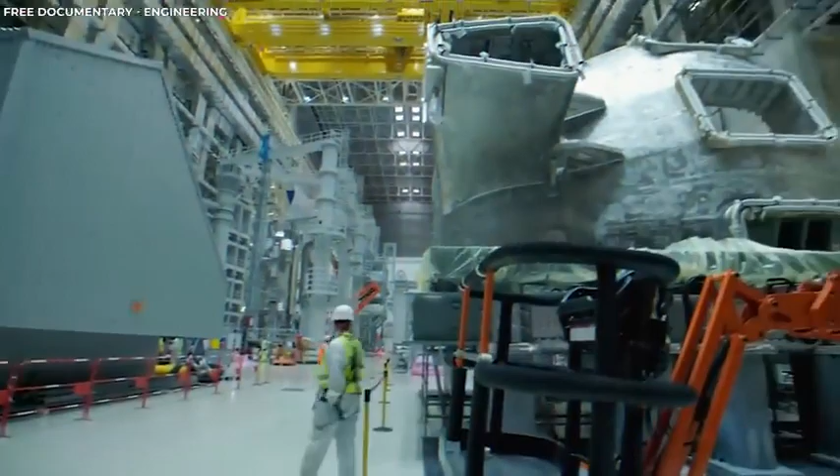The world of nuclear energy is one dominated by brilliant minds, where lots of innovation is happening. However, ITER, a monumental project that once promised great breakthroughs in nuclear energy, is close to shutting down. What is bringing this powerful project to its knees, and what does it mean for the future of nuclear energy? Keep watching to find out.

What can bring 33 of the most powerful nations together? Not the Soccer World Cup this time, but the ITER project. The International Thermonuclear Experimental Reactor, ITER project, is an ambitious international collaboration aiming to prove the feasibility of fusion as a large-scale and carbon-free source of energy.

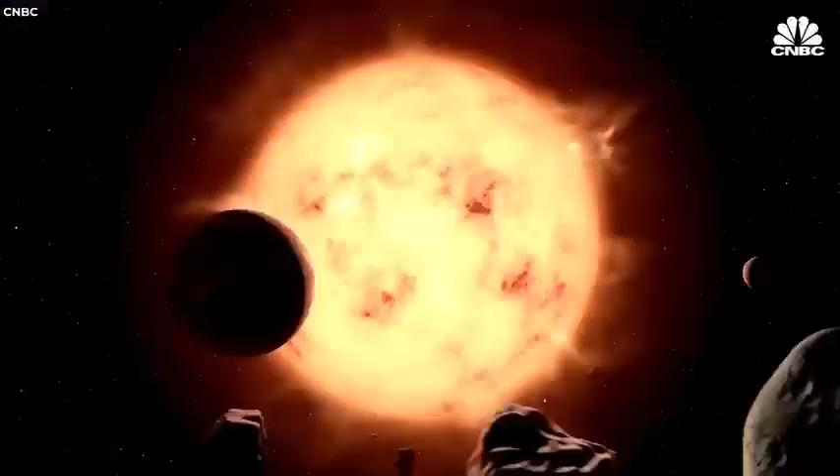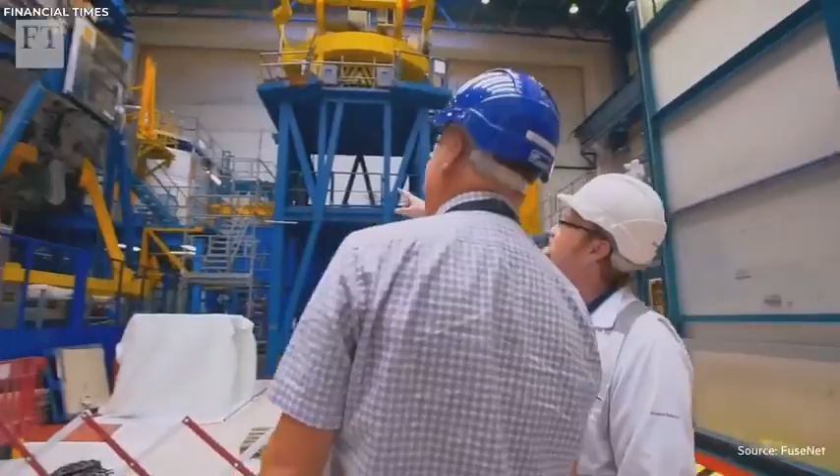Fusion, the process by which the sun and other stars produce energy, involves combining light atomic nuclei, like hydrogen, to produce heavier nuclei and tremendous amounts of energy. The primary mission of ITER is to demonstrate that it is scientifically and technologically possible to capture this energy for use on Earth.

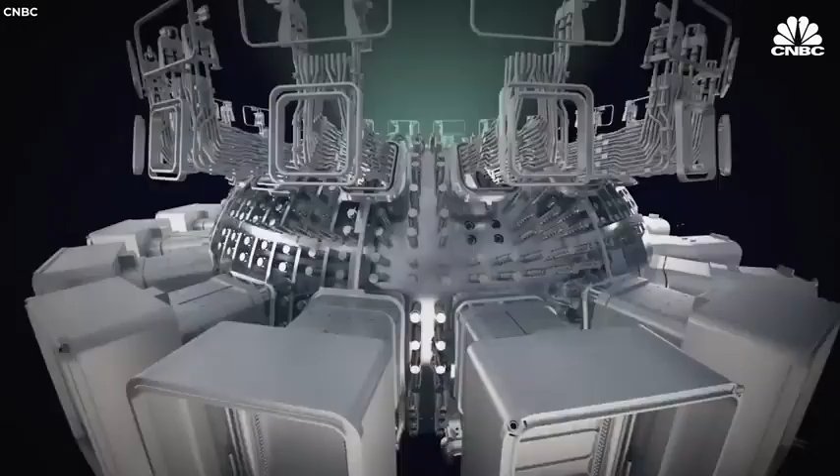The genesis of the ITER project can be traced back to the mid-1980s, at the height of the Cold War. In 1985, during a summit in Geneva, then U.S. President Ronald Reagan and Soviet leader Mikhail Gorbachev proposed an international effort to harness fusion. The formal agreement was reached in 1988, when representatives from the European Union, then the European Atomic Energy Community, Japan, the Soviet Union, and the USA, began the initial ITER design phase.

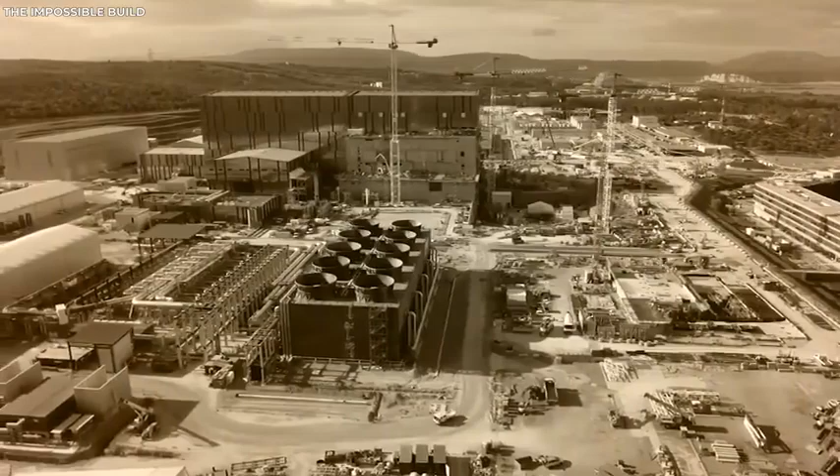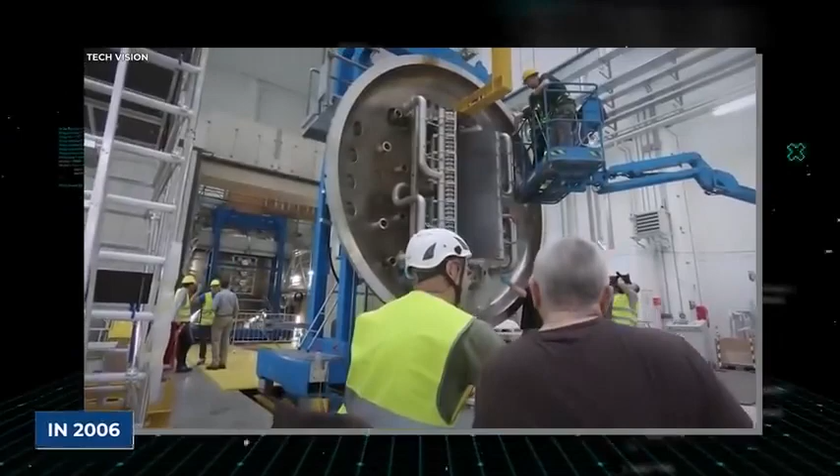Over the years, the project expanded to include 7 members, representing more than half of the world's population. The current members are the European Union, through Euratom, the United States, Russia, Japan, China, South Korea, and India. In 2006, after extensive negotiations and evaluations of multiple potential sites, the ITER members decided to build the facility in Saint-Paul-les-Durance in the south of France.

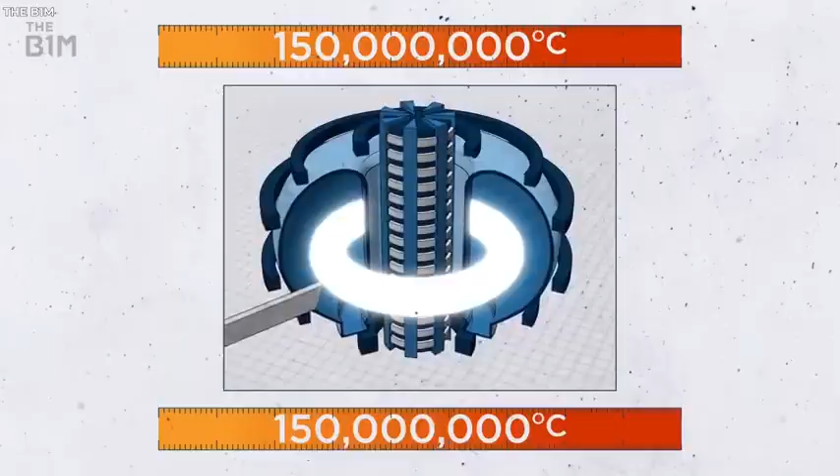At the heart of ITER is the tokamak, a magnetic confinement device designed to hold superheated plasma at conditions ripe for fusion. The tokamak's name originates from a Russian acronym meaning toroidal chamber with magnetic coils. How does this invention work? There are several aspects to it. Number 1 is magnetic confinement. The tokamak uses powerful magnetic fields to confine and stabilize the hot plasma, preventing it from touching the walls of the containment vessel.

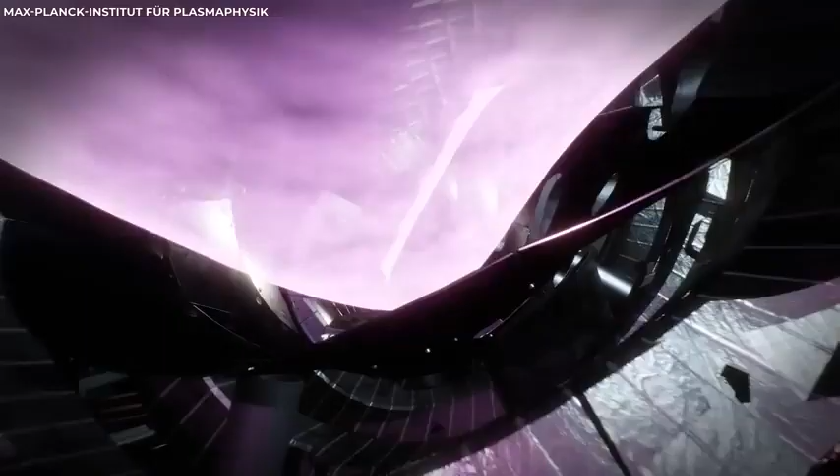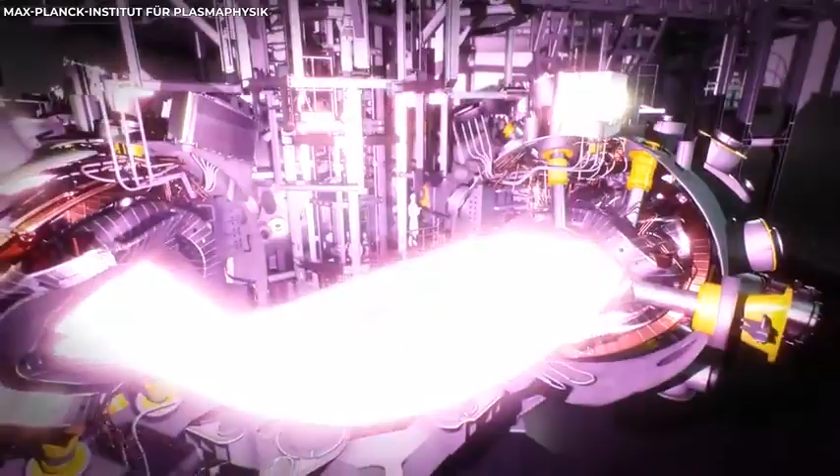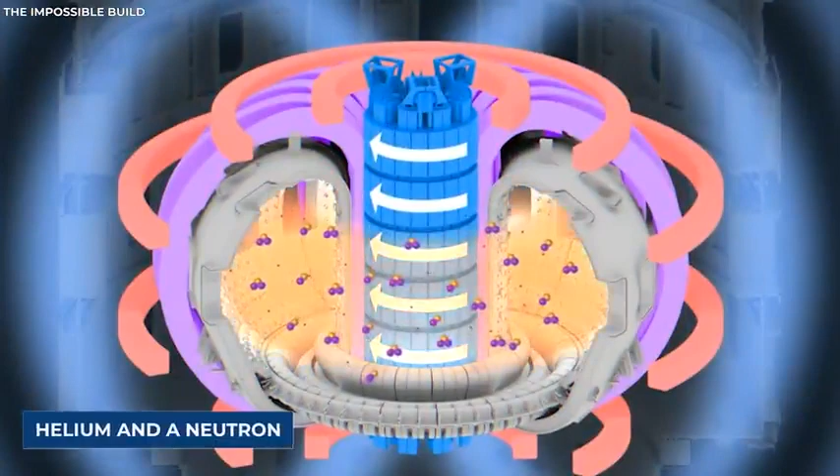Number 2 is heating the plasma. For fusion to occur, the plasma needs to be heated to temperatures exceeding 150 million degrees Celsius, which is about 10 times hotter than the core of the sun. This heating is accomplished through a combination of methods: ohmic heating, or passing a current through the plasma, neutral beam injection, and radio frequency heating. Number 3 is deuterium and tritium. ITER will use a mixture of deuterium and tritium, 2 isotopes of hydrogen, as fuel. When these isotopes fuse, they produce helium and a neutron, along with a lot of energy.

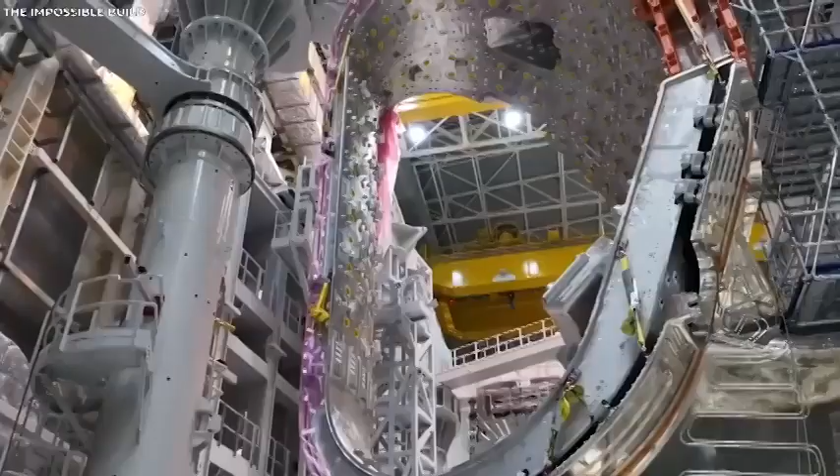Number 4 is divertor. At the bottom of the ITER tokamak is a component called the divertor. It is designed to handle and remove the waste material from the plasma. Number 5 is superconducting magnets. ITER employs large superconducting magnets to generate the strong magnetic fields necessary for plasma confinement. These magnets are cooled by liquid helium to make them superconducting, which ensures that they can carry the massive currents required without losing energy to electrical resistance.

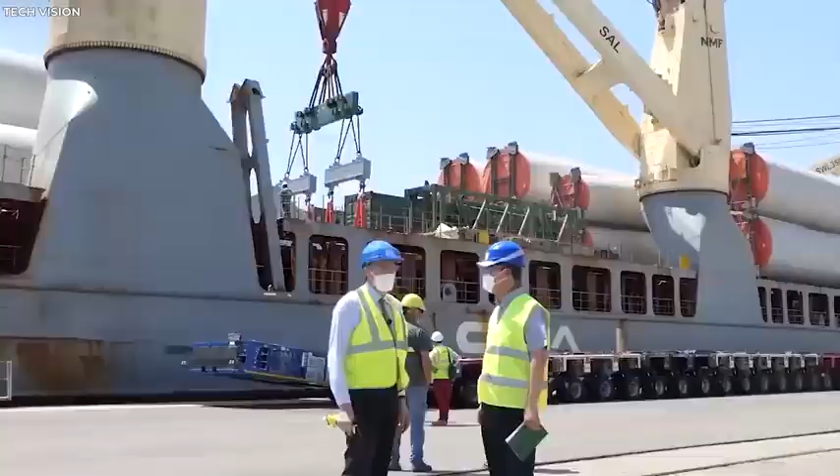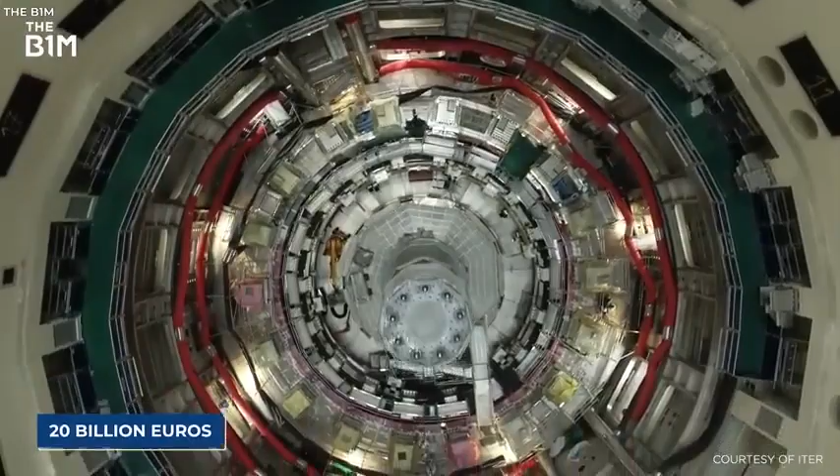How much has ITER cost its sponsors? As with many international mega projects, the budget for ITER has grown over time. Initially, in the early phases, the project was estimated to cost around 5 billion euros. However, as of the last update in 2021, the cost of ITER has risen to approximately 20 billion euros. It's worth noting that this figure could continue to evolve as the project progresses. There are several reasons for the cost overruns.

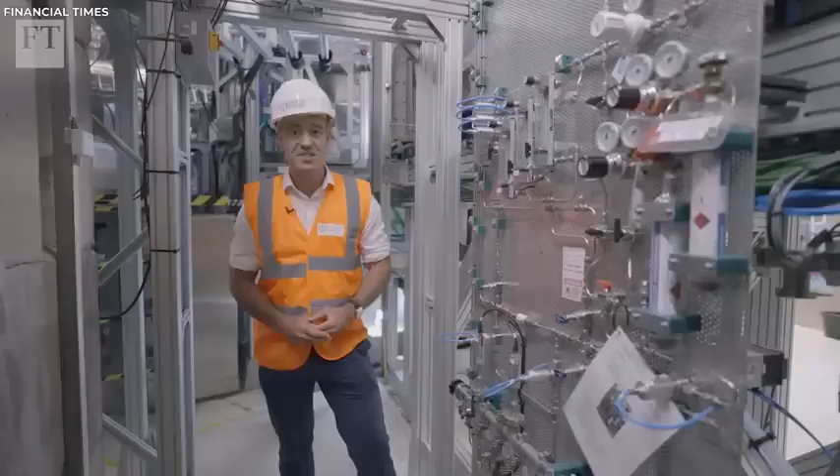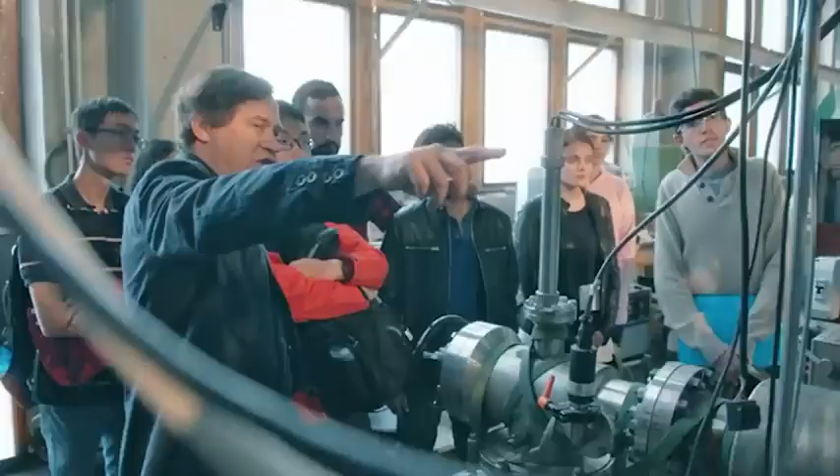Technical challenges. Fusion is an incredibly challenging process to reproduce on Earth. This means the technologies and methodologies needed are groundbreaking and often untested on such a scale, leading to uncertainties and unexpected problems that can inflate costs. Logistics of international collaboration. Coordinating between the 7-member entities, each of which is responsible for delivering specific parts of the reactor, has proven more complex and time-consuming than initially anticipated.

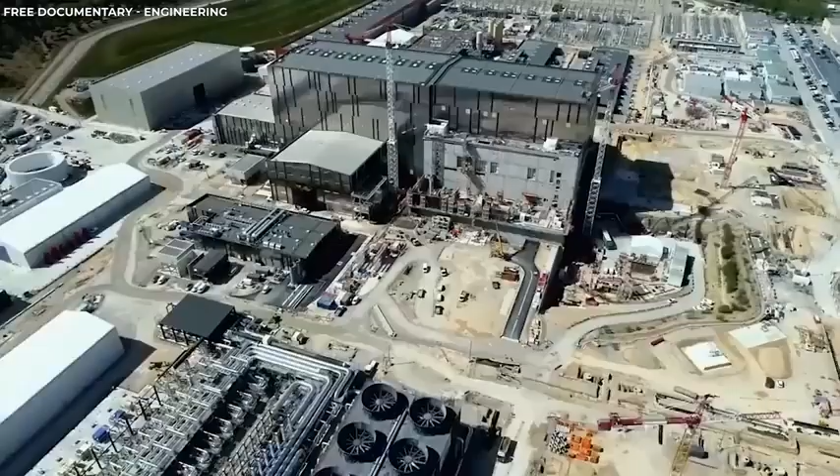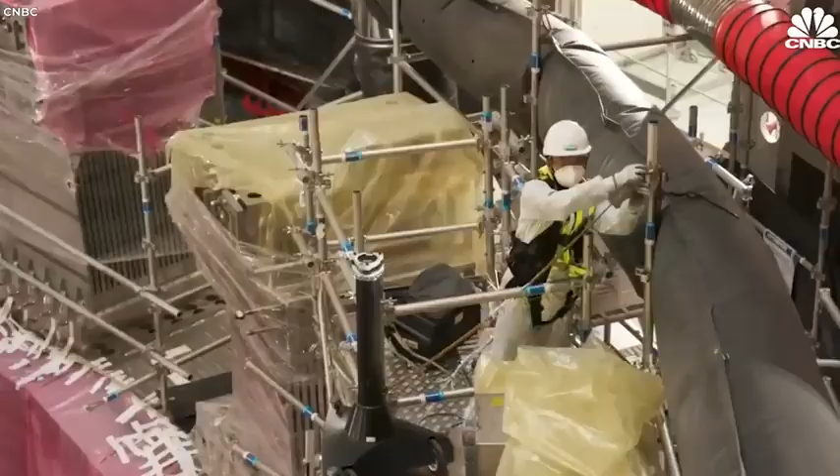Regulatory and safety measures. Building the world's largest tokamak requires stringent safety and quality assurance processes. Ensuring that ITER meets the highest standards has sometimes led to delays and added expenses. Despite the costs, many argue that the potential benefits of mastering fusion technology far outweigh the investment. Fusion promises a virtually limitless source of energy with minimal carbon emissions and without the long-lived radioactive waste associated with fission-based nuclear power.

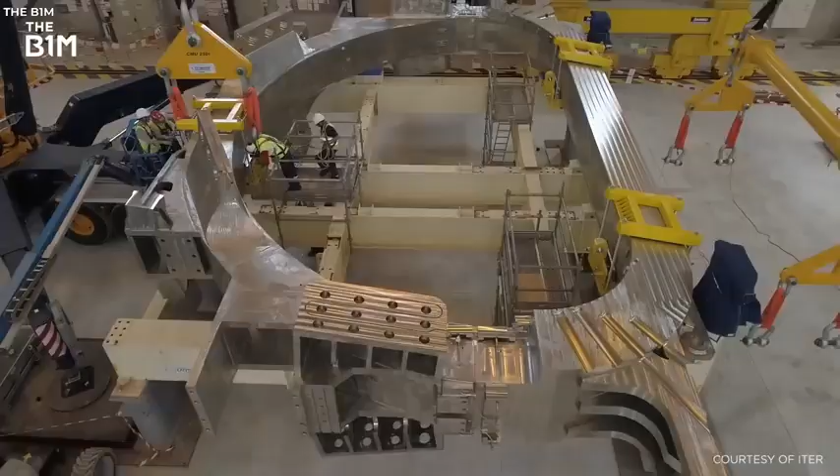Progress and future plans: the ITER project has reached several significant milestones. Construction of many of the primary facilities is either complete or well underway, and the assembly phase of the tokamak has begun.

However, when operational, ITER won't generate electricity directly. Instead, it will produce 500 MW of fusion power for 20-minute durations, a significant increase from previous experimental reactors. This will serve as proof of concept and open the door to DEMO, the next step fusion power plant.

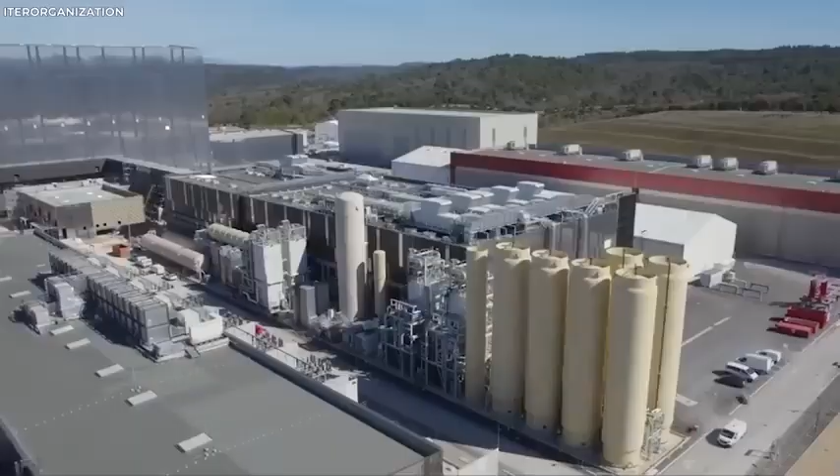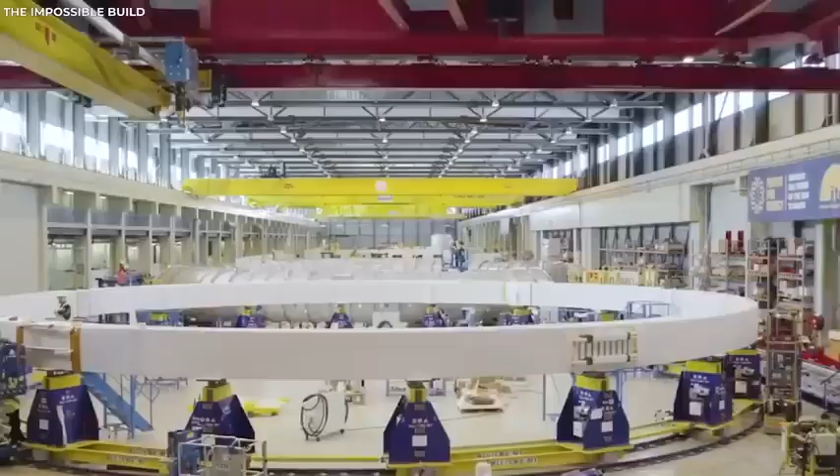One criticism of the ITER project is its high and rising electricity consumption. The ITER project will require hundreds of megawatts of electricity from the regional electric grid to operate its auxiliary systems, such as cryostats, vacuum pumps, heating systems, and magnet power supplies.

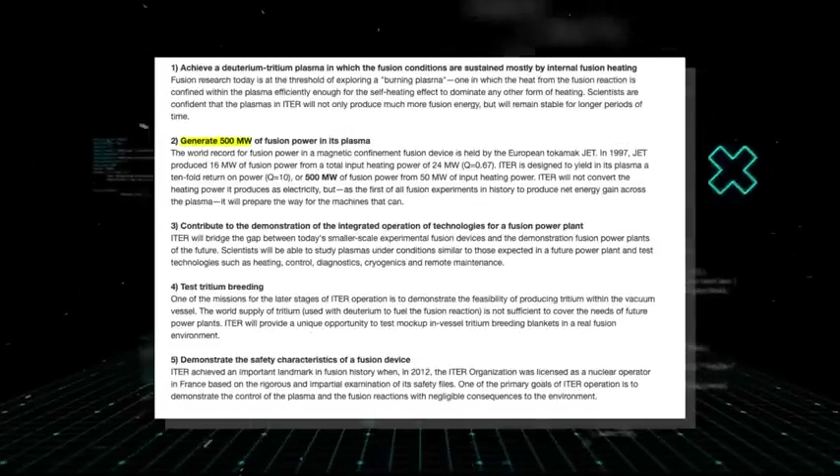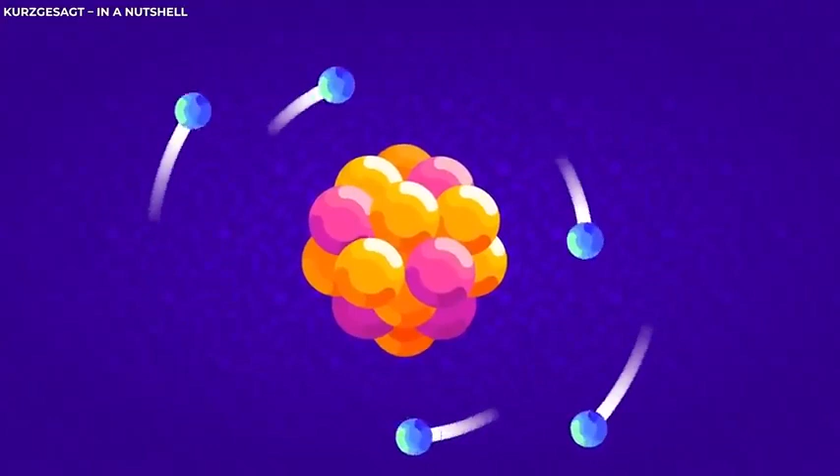The ITER website states that the project will produce 500 megawatts of fusion power with an input power of 50 megawatts. However, this statement is problematic, as it implies that both numbers refer to electric power. In actual fact, the output power refers to fusion power, embodied in neutrons and alphas, which cannot be converted to electricity in ITER.

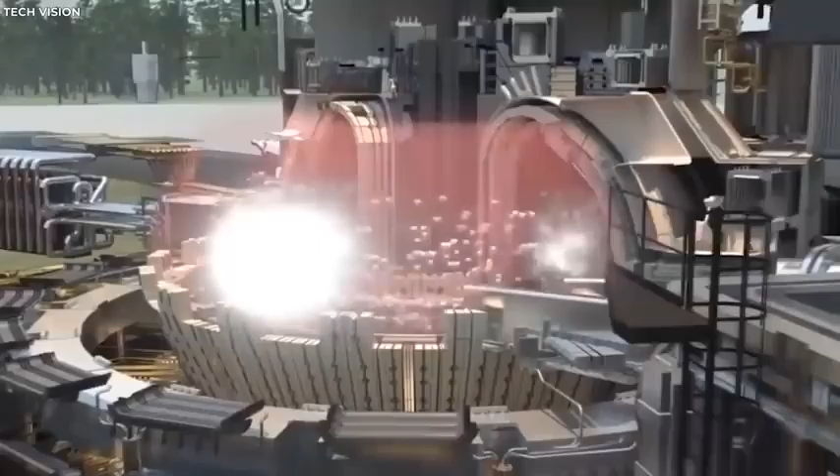The input power refers to the heating power injected into the plasma to help sustain its temperature and current, and it is only a small fraction of the overall electric input power to the reactor, which varies between 300 and 400 megawatts.

Moreover, this electric input power does not include the energy invested in the construction and maintenance of the reactor facility, which is also enormous. Critics point out that the ITER project will consume more energy than it produces, and that it will divert resources from more feasible and cost-effective energy research projects.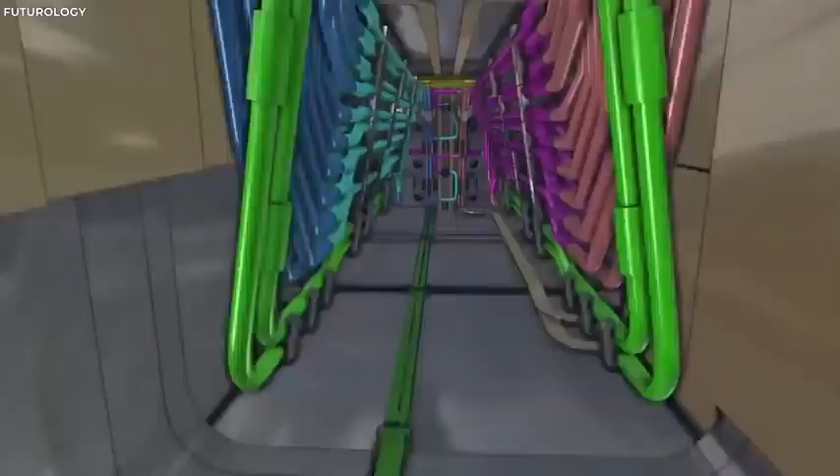Another criticism of the ITER project is its dependence on tritium fuel, which is scarce, radioactive, and difficult to handle. Tritium is a hydrogen isotope that does not exist naturally on Earth, but has to be produced artificially by bombarding lithium with neutrons. The ITER project plans to use a 50-50 mixture of deuterium and tritium as fuel for fusion, as it has the highest reactivity among possible fusion fuels.

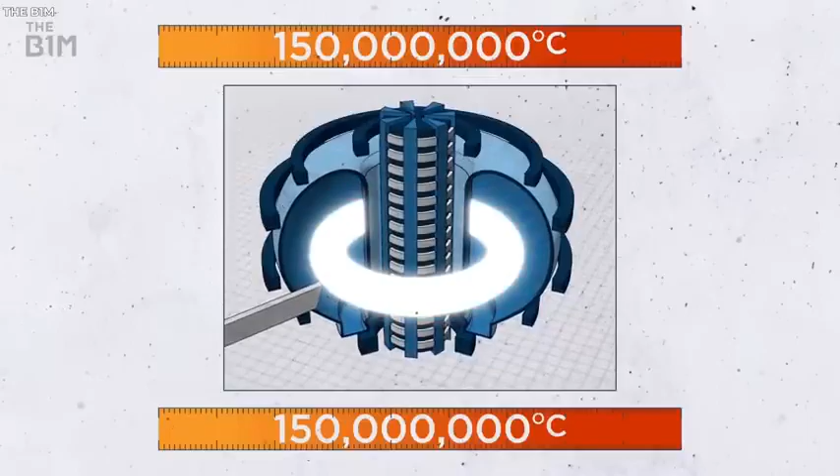However, we run into several problems using tritium as fuel. First, there is no natural supply of tritium on Earth, and the current global inventory is only about 25 kilograms, which increases by only about half a kilogram per year.

The ITER project will require at least 1 kilogram of tritium annually, which will have to be purchased from fission reactors or produced in test modules inside the reactor. Second, tritium is somewhat radioactive, with a half-life of only 12.3 years. This poses safety concerns for its storage, transport, and use in the reactor.

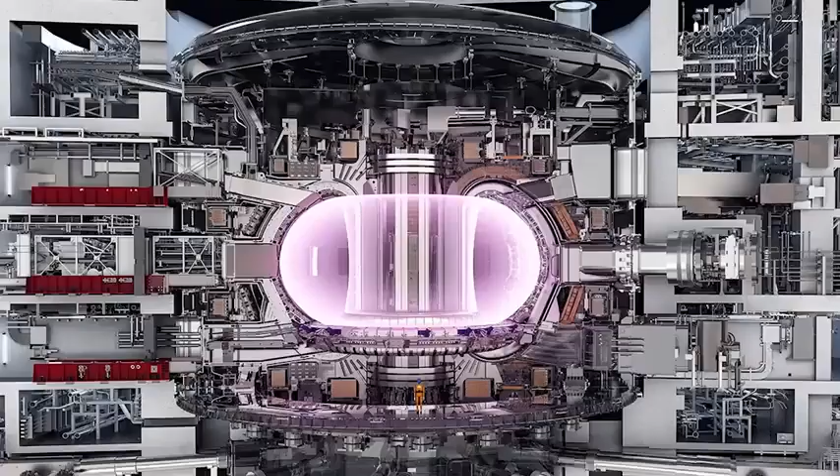Third, tritium is difficult to handle and recover in a fusion reactor. Analyses of DT operation in ITER indicate that only 2% of the injected tritium will be burned in fusion reactions, while 98% will exit the plasma unscathed or be trapped in various reactor components. Some tritium will inevitably leak into the environment or decay into helium-3. Critics doubt that tritium can ever be supplied or managed adequately for a large-scale fusion reactor.

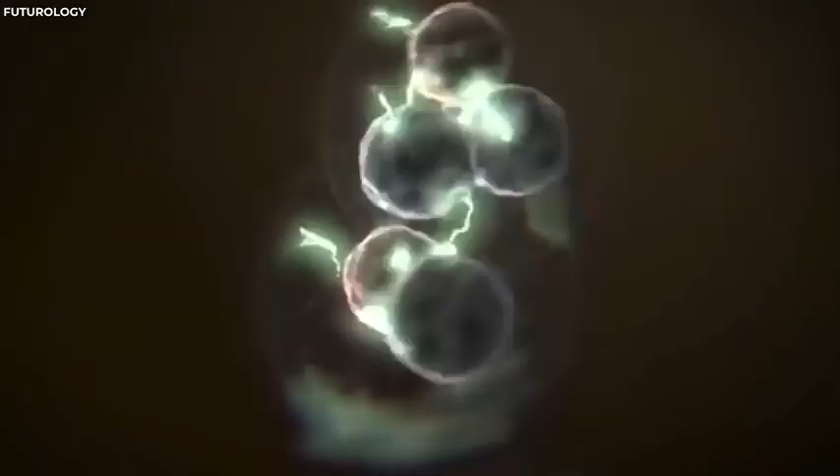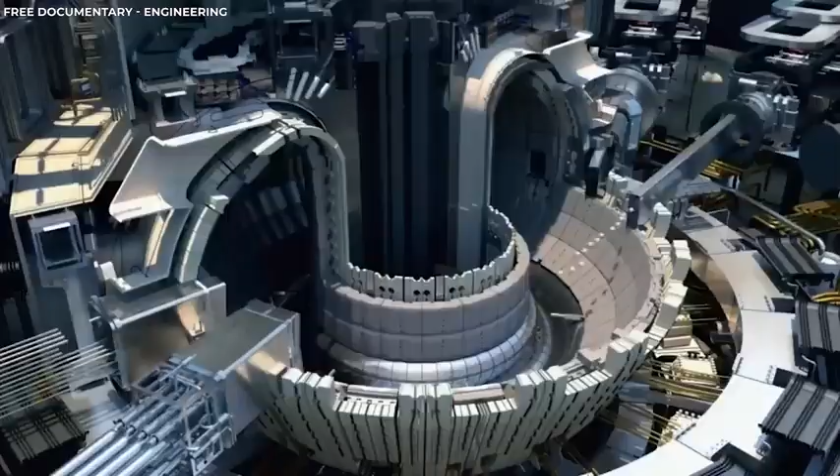A third criticism of the ITER project is its production of large amounts of neutron radiation and radioactive waste. The fusion of deuterium and tritium produces helium and a neutron, which carries most of the energy released by the reaction. However, these neutrons are not benign solar-like radiation, but rather high-energy particles that can damage materials and induce radioactivity.

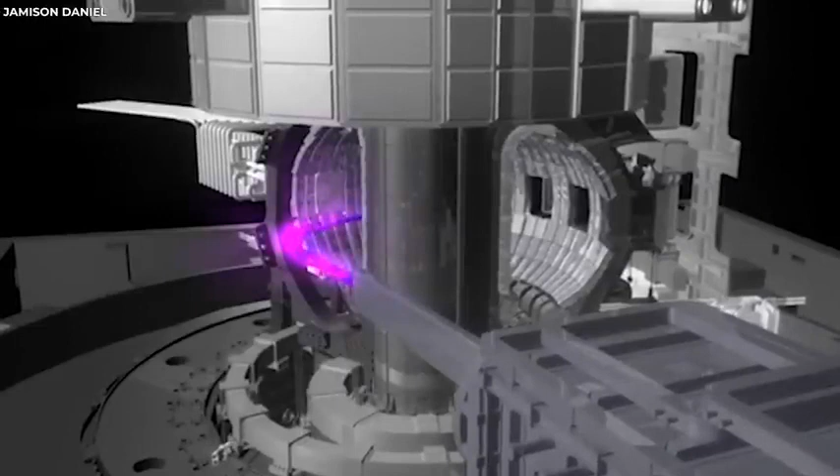The neutrons will escape the magnetic field that confines the plasma and hit a blanket of material surrounding the plasma. The blanket will absorb the neutron energy and transfer it to a coolant system that can be used for electricity generation or other purposes. The blanket will also breed more tritium from lithium for future use.

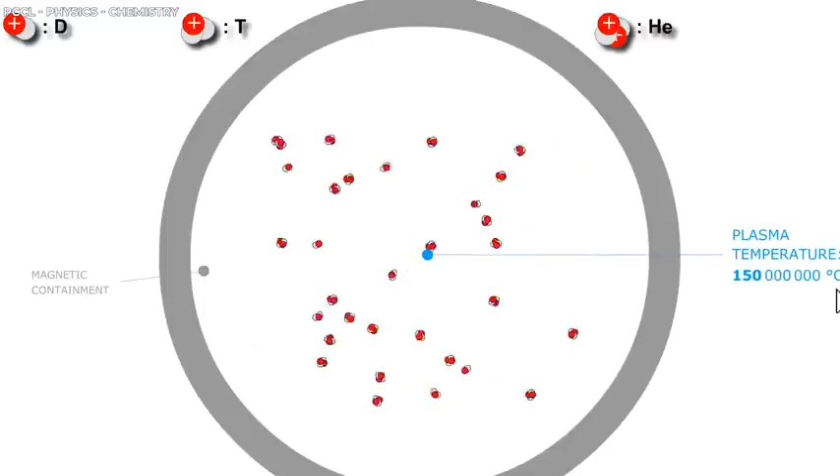However, these functions come at a cost. The neutron bombardment will cause swelling, embrittlement, and fatigue in exposed materials, create dangerous radioactivity in all exposed reactor components, and generate huge volumes of radioactive waste that will have to be stored and disposed of safely.

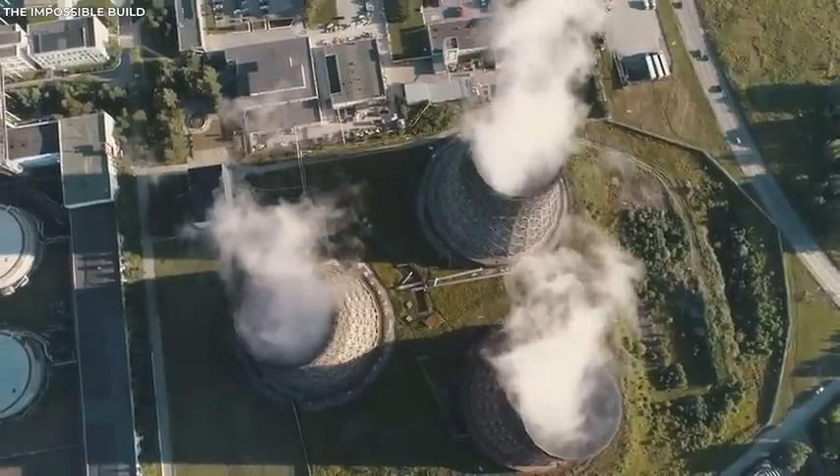The ITER project estimates that it will produce 30,000 tons of radioactive waste over its lifetime, including decommissioning, of which 6,000 tons will still be dangerously radioactive after 100 years. Critics contend that fusion reactors are not as environmentally friendly or safe as they claim to be.

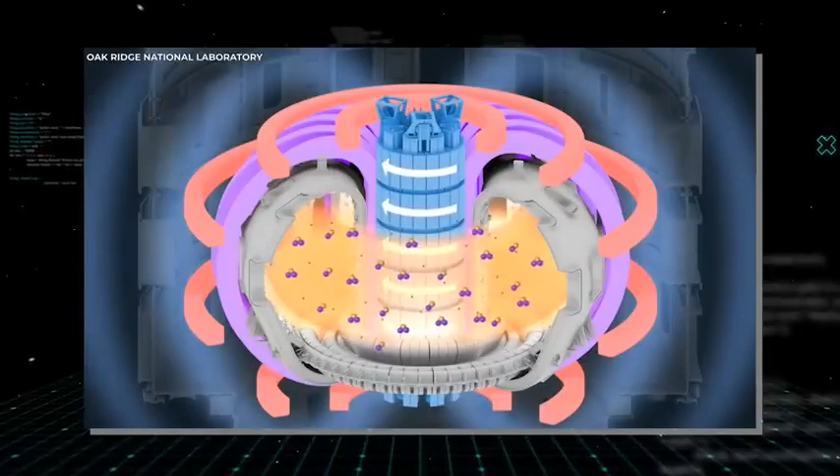A fourth criticism of the ITER project is its demand for cooling water resources. Fusion reactors require torrential water flows to remove heat from various reactor systems, such as reactor vessels, plasma heating systems, tokamak electrical systems, cryogenic refrigerators, and magnet power supplies. The ITER project will use cooling water from the Canal de Provence, which is formed by channeling the Durance River. The cooling water will be recirculated and discharged into the atmosphere by cooling towers.

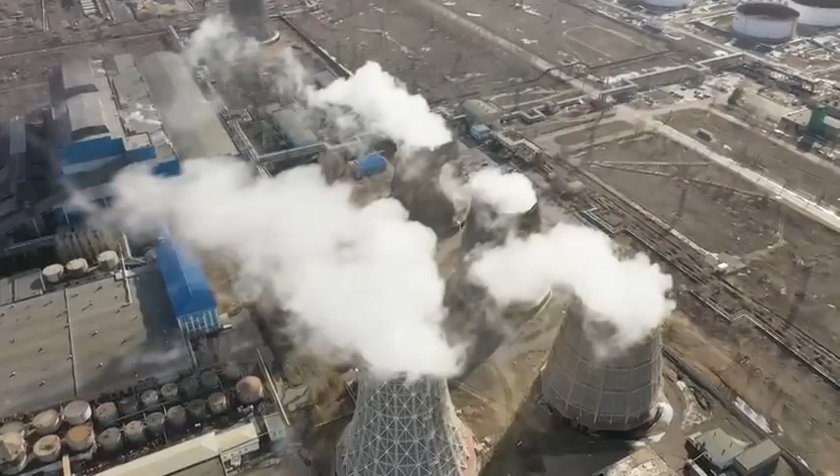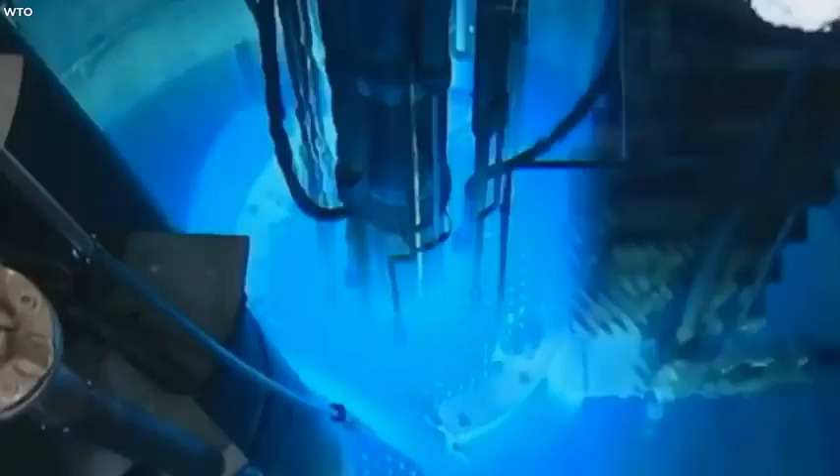The ITER project estimates that the total heat load could be as high as 1,000 megawatts, and that the combined flow rate of all the cooling water will be as large as 12 cubic meters per second, or more than 1/3 of the flow rate of the canal.

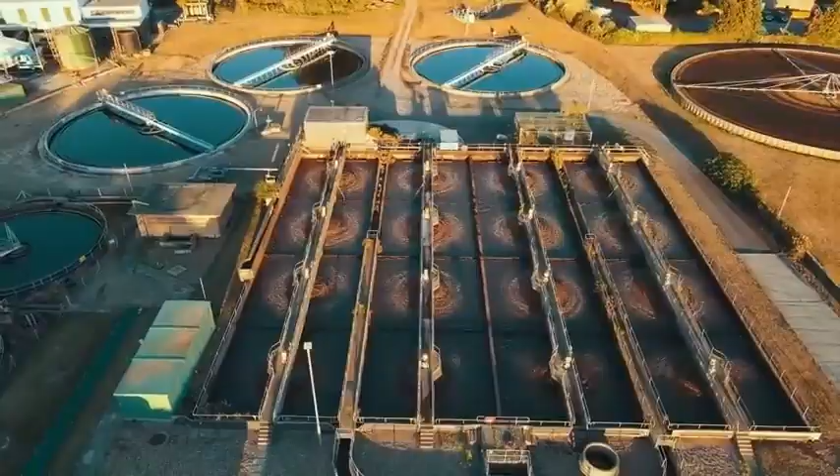Critics point out that fusion reactors are much greater consumers of water than any other type of power generator, because of the huge parasitic power drains that turn into additional heat that needs to be dissipated on site. They also question the availability and sustainability of cooling water resources in a world where fresh water and even cold ocean water are becoming increasingly scarce.

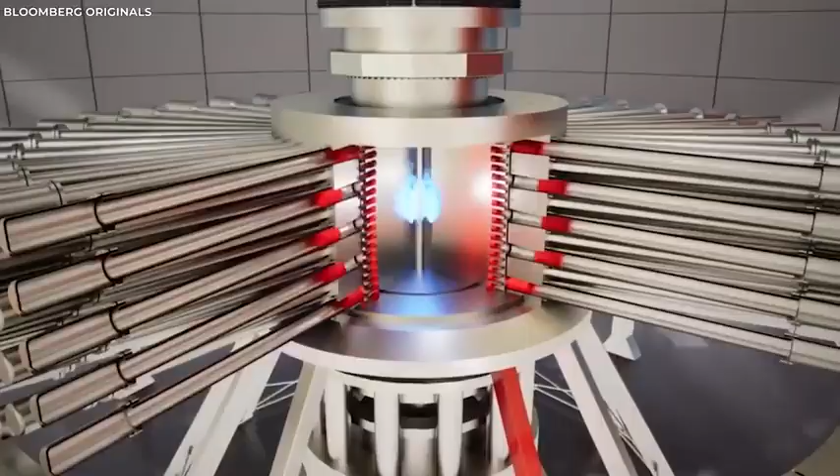Where does that leave us with nuclear energy? Thankfully, other technologies are coming up. One of them is the stellarator. The stellarator is a type of nuclear fusion reactor that uses magnetic fields to confine a plasma, the hot and charged state of matter that fuels the fusion reactions.

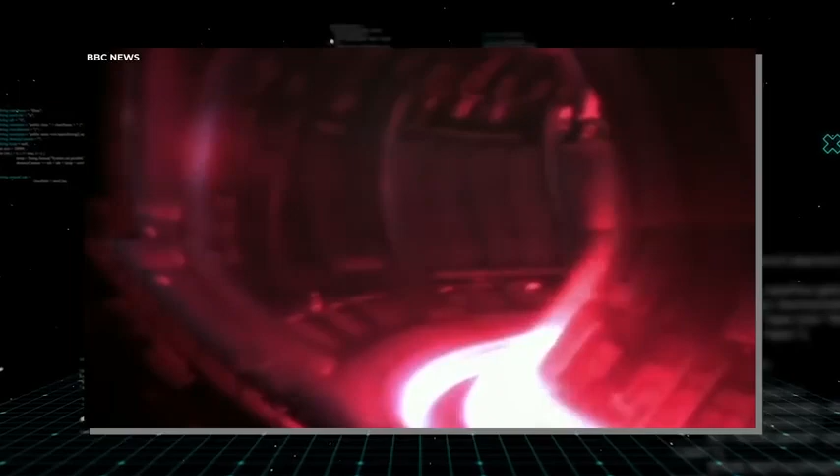Unlike the more common tokamak design, which relies on a large electric current flowing in the plasma to create part of the magnetic field, the stellarator generates the entire magnetic field with external coils.

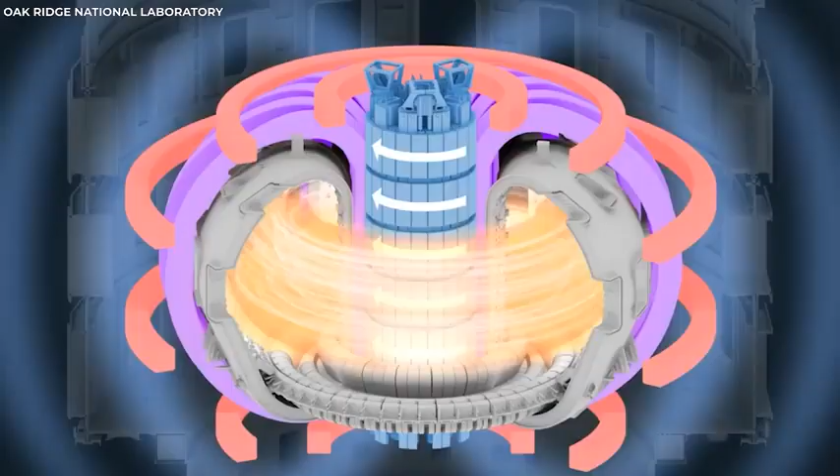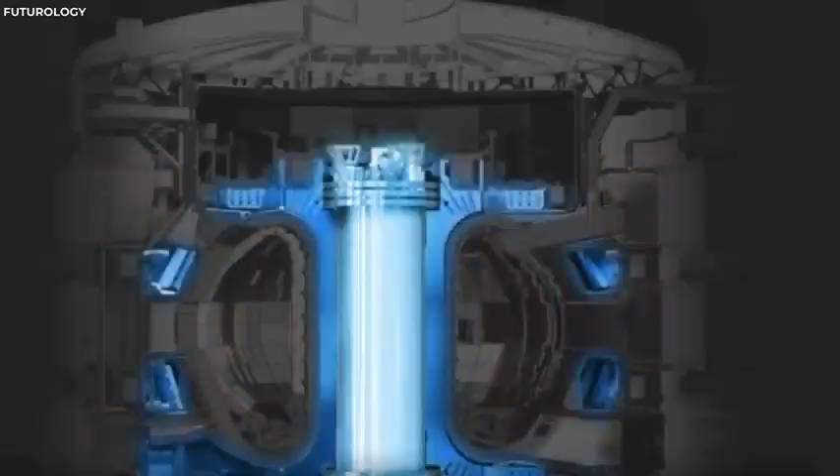How is the stellarator different from the ITER? There are several ways. First, the magnetic field. In a tokamak, the magnetic field that twists and shapes the plasma is formed by a combination of an external toroidal field and an internal poloidal field. The poloidal field is generated by a large electric current flowing in the plasma, which is induced by a transformer. In a stellarator, the magnetic field is produced entirely by external non-axis symmetric coils, which have a complex and twisted shape.

Next, plasma current. In a tokamak, the plasma current is essential for creating part of the magnetic field and maintaining the plasma equilibrium. However, it also causes several problems, such as resistive heating, magnetohydrodynamic or MHD instabilities, disruptions, and runaway electrons. In a stellarator, the plasma current is negligible or zero, which avoids these issues but also reduces the plasma stability and performance.

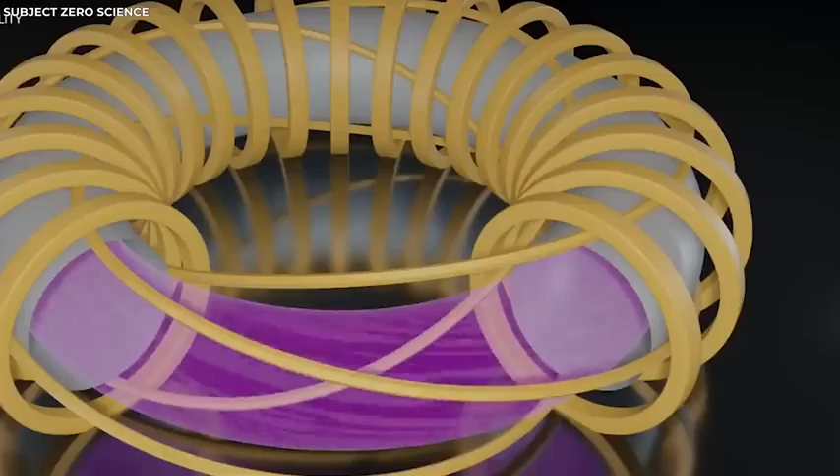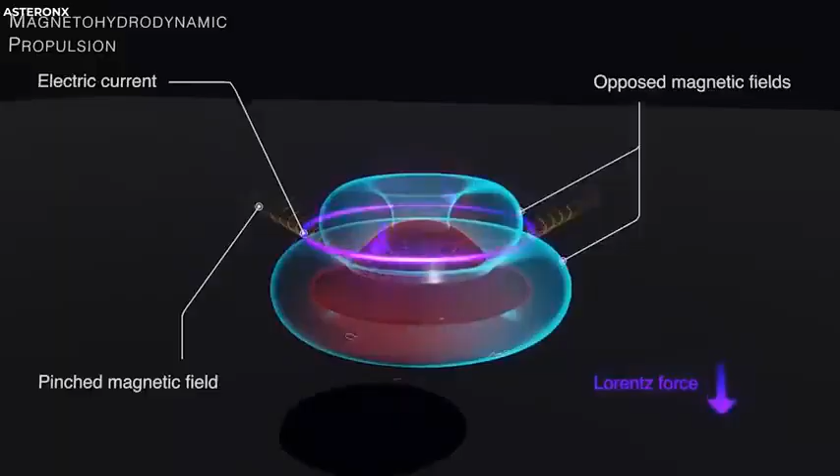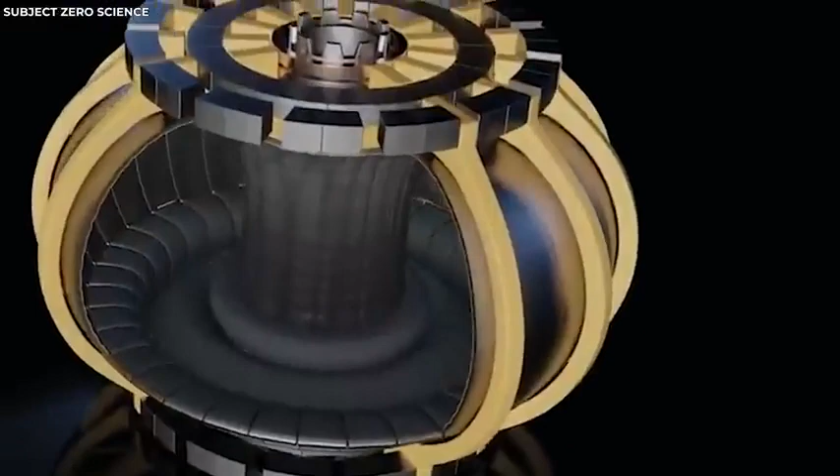Next, magnetic shear. In a tokamak, the magnetic shear is usually positive throughout the plasma, which means that the rotational transform, the angle of twist of the magnetic field lines, increases with the radius. This helps to stabilize some MHD modes and reduce plasma turbulence. In a stellarator, the magnetic shear is typically negative or zero, which means that the rotational transform decreases or stays constant with the radius. This can lead to more MHD activity and transport losses.

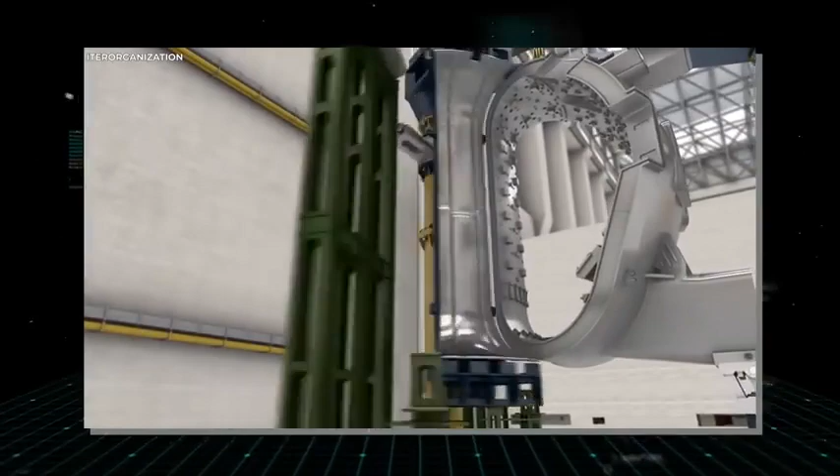Next, plasma shape. In a tokamak, the plasma cross-section is usually circular or elliptical, with some degree of triangularity or squareness. This affects the plasma confinement and stability. In a stellarator, the plasma cross-section can have various shapes, depending on the coil configuration. Some stellarators have a bean-shaped or crescent-shaped cross-section, which can improve the plasma quality.

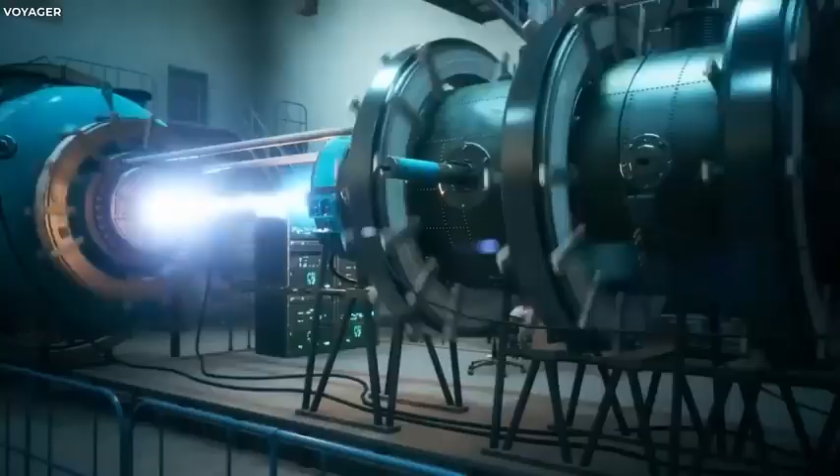These differences give the stellarator several advantages for a fusion power plant. First, steady-state operation. The stellarator can run continuously without interruptions since it does not need to periodically ramp up and down the plasma current. This reduces the stress on the reactor components and increases the power output.

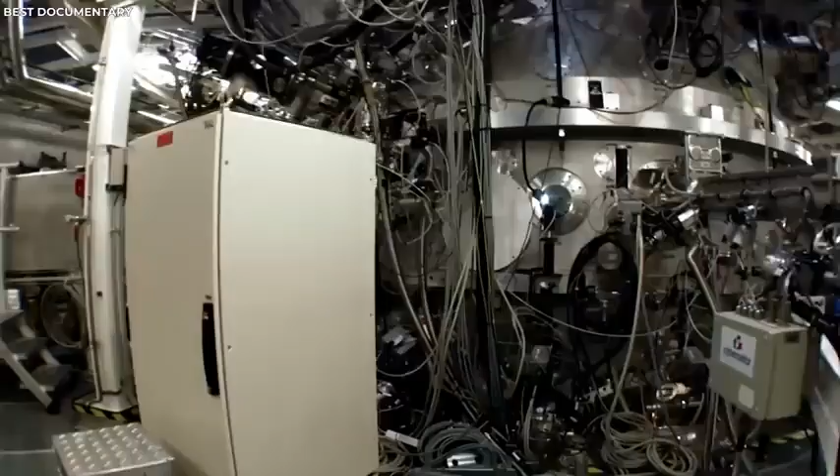Second, low recirculating power. The stellarator does not need to use a transformer to induce the plasma current, which consumes a significant fraction of the electricity generated by a tokamak. This improves the efficiency and economics of the fusion plant.

Third, benign heat loads. The stellarator can handle high plasma densities and pressures without producing large edge instabilities that can damage the plasma-facing components. This allows for better plasma performance and longer component lifetimes.

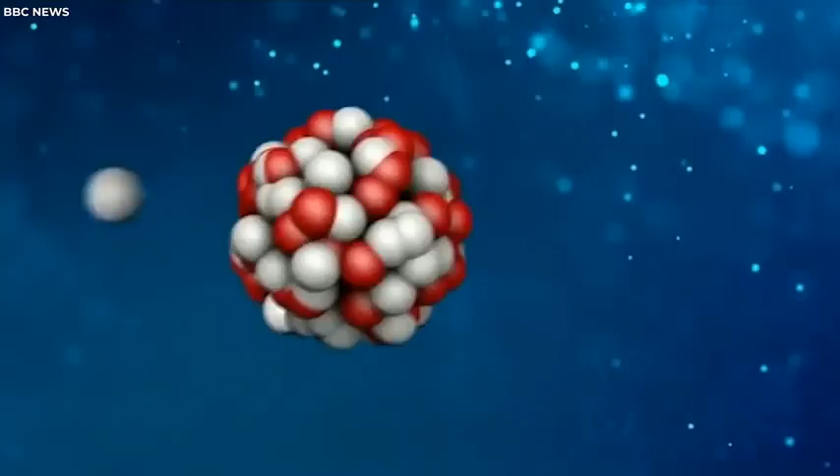And fourth, no runaway electrons. The stellarator avoids the formation of runaway electron beams that can occur in tokamaks during disruptions. These beams can cause severe damage to the reactor walls and pose a safety hazard.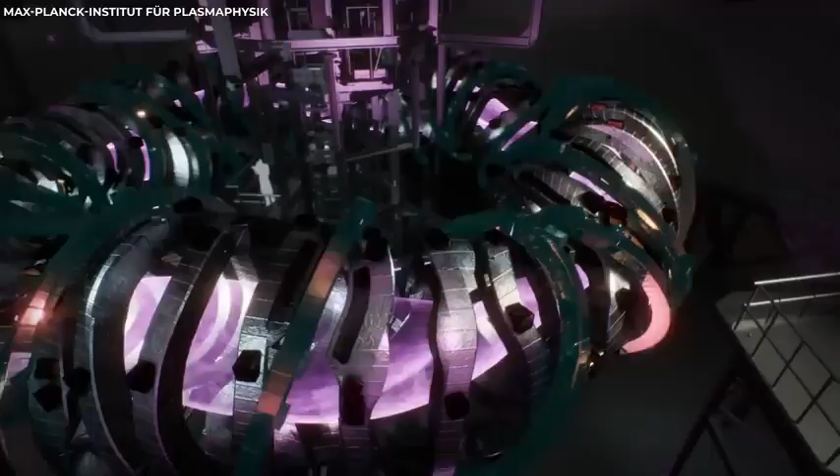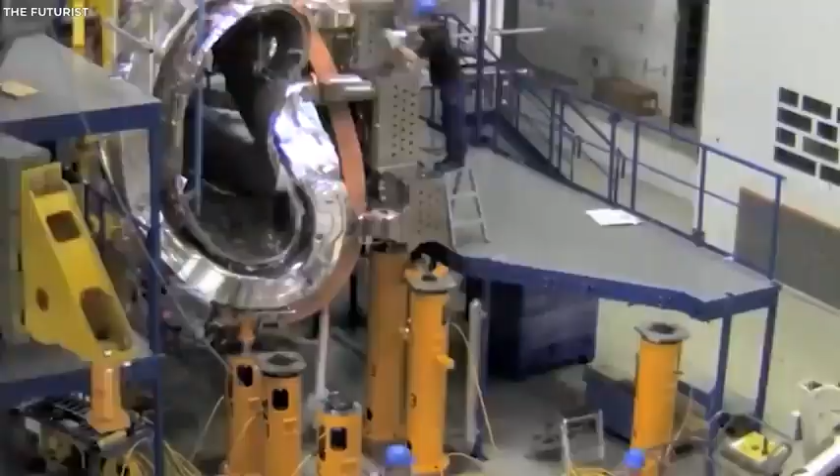The Wendelstein 7-X, or W7-X, is the world's largest and most advanced stellarator, built in Germany by the Max Planck Institute for Plasma Physics (IPP). It is designed to test the feasibility of the stellarator concept for a power plant by achieving high plasma temperatures, densities, and confinement times. It is also testing an optimized magnetic field configuration that minimizes the heat and particle losses from the plasma. Some of the achievements and challenges of W7-X are high plasma performance.

W7X has demonstrated plasma temperatures of over 100 million degrees Celsius, comparable to those in a tokamak of the same size. It has also achieved a record value of the triple product, a measure of the plasma quality for fusion, by using ice pellets to fuel the plasma. Long plasma duration. W7X has produced plasma discharges lasting up to 30 seconds, showing the potential for continuous operation.

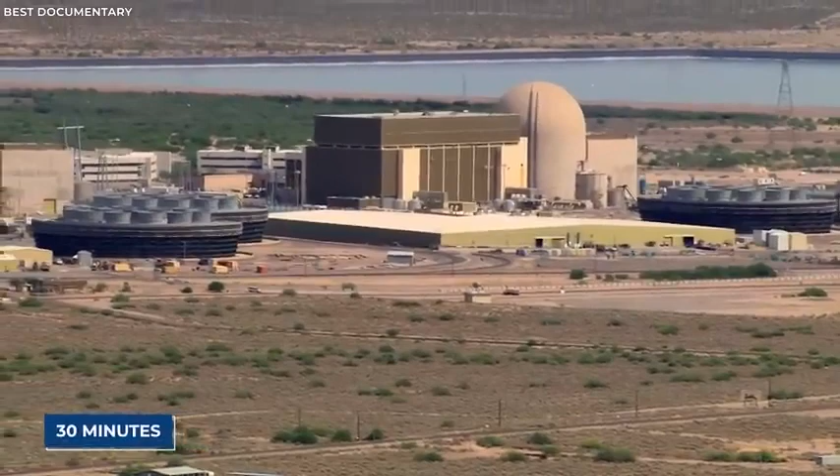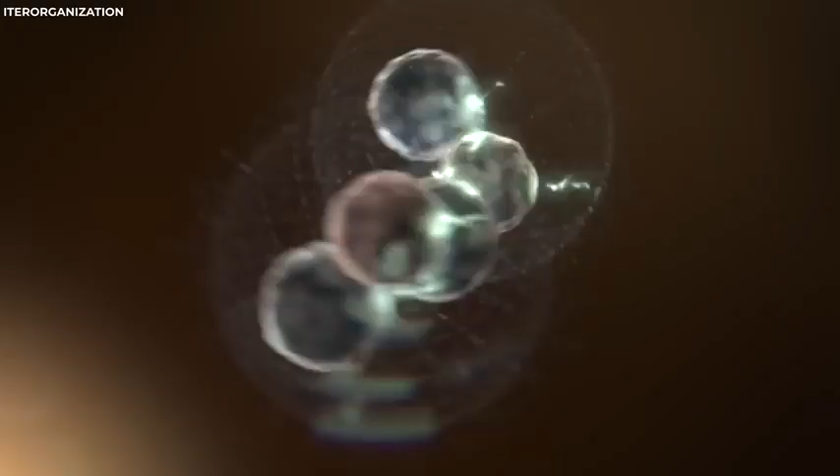It aims to extend this duration to 30 minutes after installing water-cooled divertor plates that can handle higher heat fluxes from the plasma. Low neoclassical transport. W7X has confirmed that its complex and twisted magnetic field reduces the neoclassical transport, a type of heat loss caused by collisions and drifts of plasma particles. This validates the computer-aided design of the stellarator and improves the plasma confinement.

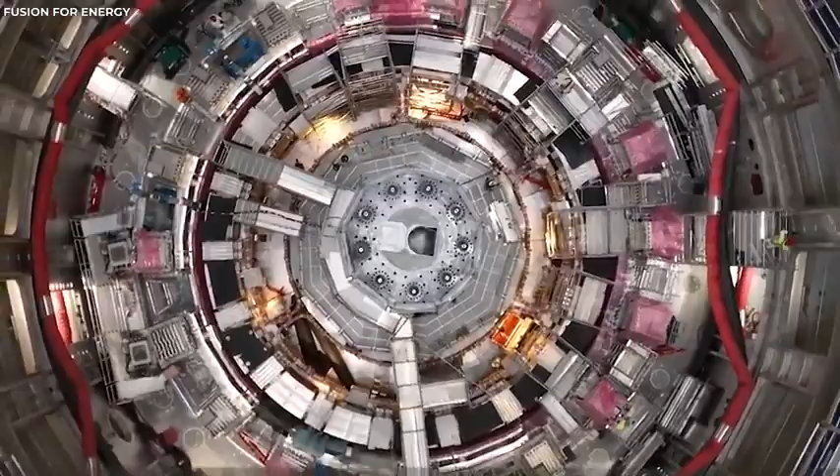High plasma turbulence. W7X has also observed that its magnetic field does not suppress the plasma turbulence, another source of heat loss caused by fluctuations and instabilities in the plasma. This limits the maximum achievable ion temperature and requires additional heating methods to overcome it.

There are exciting startups that are working hard to make stellarators a reality. One of them is Type 1 Energy. Type 1 Energy has recently secured $29 million in funding from several investors, including Breakthrough Energy Ventures, which is backed by Bill Gates and other billionaires.

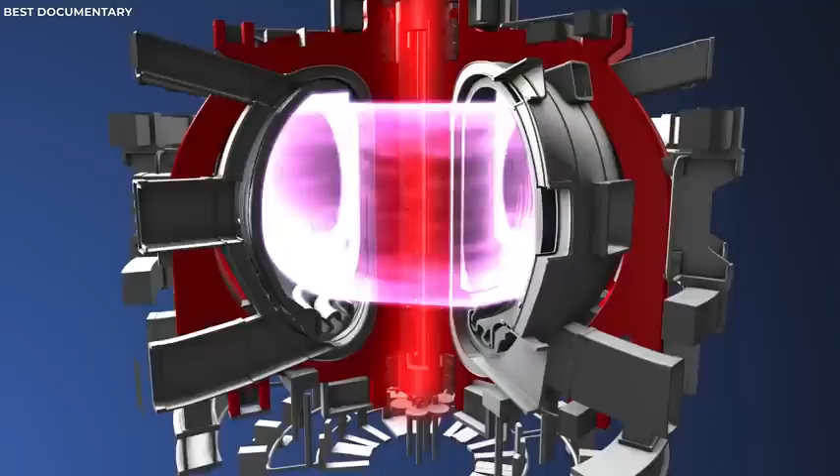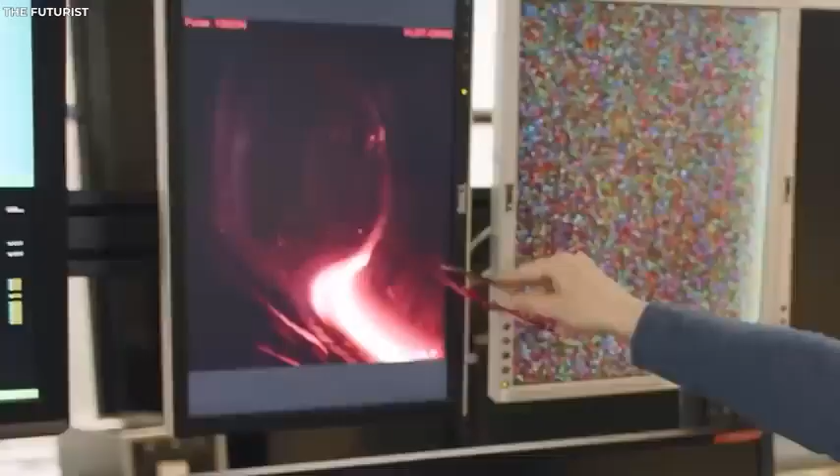The company plans to use the money to develop its Fusion Direct program, which leverages recent advances in stellarator fusion performance, plasma science, and high-temperature superconducting magnet technology. These technologies enable Type 1 Energy to create a low-risk short-term path to fusion energy without building another costly, large-scale science validation machine.

Type 1 Energy has a strong technical team that includes experts from the University of Wisconsin-Madison, the Max Planck Institute for Plasma Physics, and the Massachusetts Institute of Technology. The company also has global partnerships with top research institutions, universities, and industrial companies in fusion science and technology. The company's CEO is Christofer Mowry, who is a former CEO of General Fusion and a senior advisor on fusion at Breakthrough Energy Ventures.

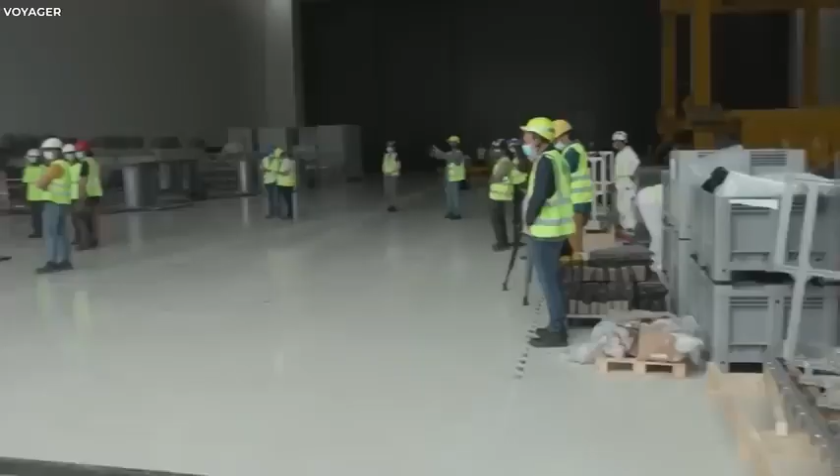Type 1 Energy's goal is to build a risk reduction platform for the stellarator over the next few years. This platform will be low cost, but have a high level of performance. It will be used to test several engineering design choices made by the company and confirm the accuracy of its stellarator plasma physics models and simulations. The company hopes to develop a viable fusion power plant, FPP, that can generate electricity from fusion energy on the grid in the coming decade.

Marvel Fusion is a German startup that is working on a laser-based nuclear fusion reactor, which aims to offer clean and safe energy for the future. Marvel Fusion's approach is different from the conventional methods of achieving fusion, which use either powerful magnets or intense lasers to heat and compress a plasma of hydrogen isotopes.

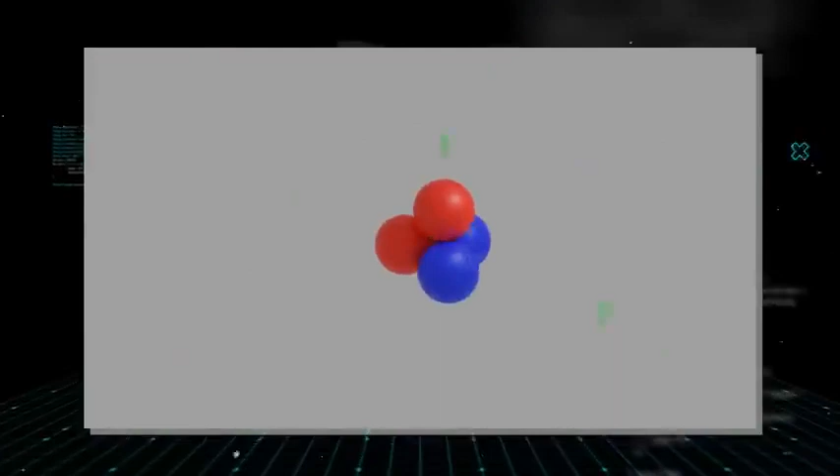Instead, Marvel Fusion uses ultra-short pulse lasers, which can amplify the laser beam to extremely high intensities in very short durations. These lasers are then focused on a fuel target made of boron, which is abundant and cheap on Earth. When the laser hits the boron target, it creates a Coulomb explosion, which means that the positively charged nuclei repel each other violently. This generates a shock wave that compresses and heats the fuel to fusion conditions, producing helium and energetic alpha particles. The alpha particles can then be converted into electricity using direct energy conversion techniques.

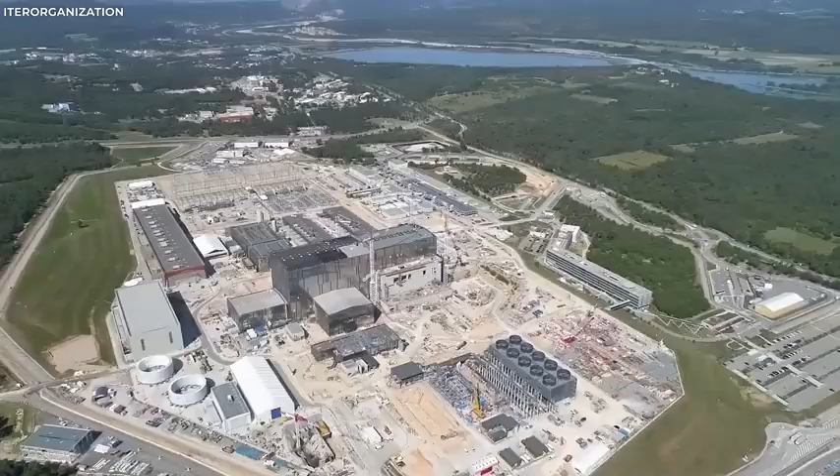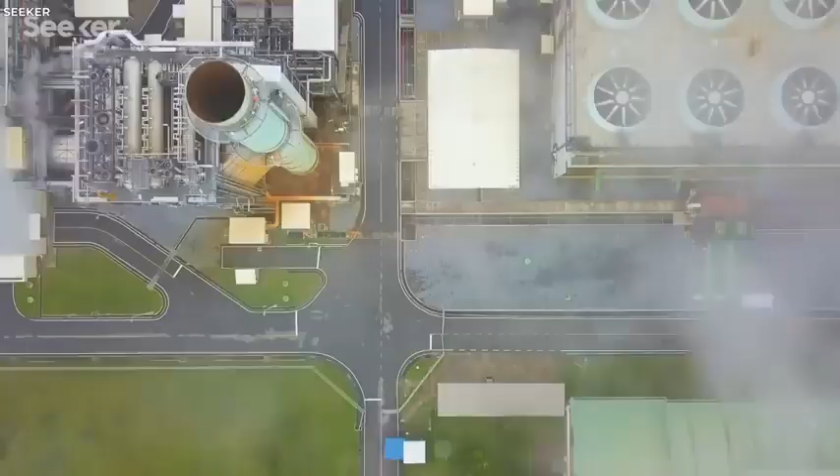Marvel Fusion claims that its technology has several advantages over other fusion methods, such as lower temperatures, higher efficiency, smaller size, and lower cost. The startup also says that its fusion reactor will produce minimal nuclear waste, which will decay within 100 years and can be recycled or reused. So far, Marvel Fusion has raised a €35M Series A round from investors such as Earlybird Venture Capital and Taavet Hinrikus, the co-founder of TransferWise.

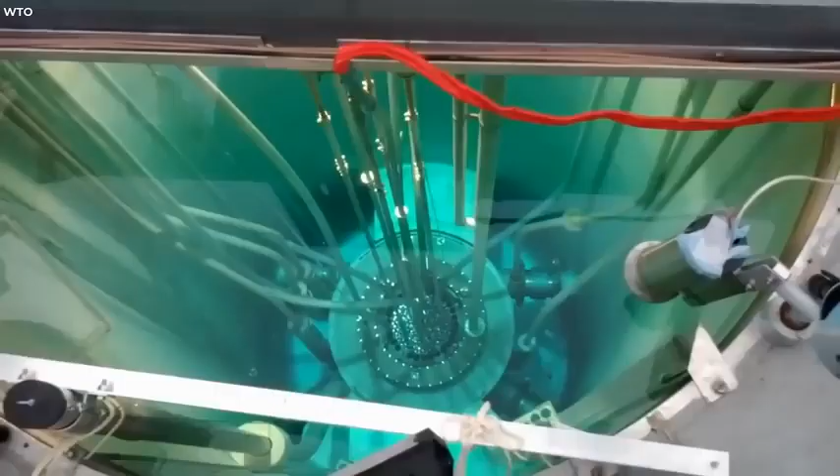The startup plans to use the funds to demonstrate that its laser technology works and to build its own fusion facility. Marvel Fusion hopes to achieve a positive energy balance, meaning that it produces more energy than it consumes, by 2025.